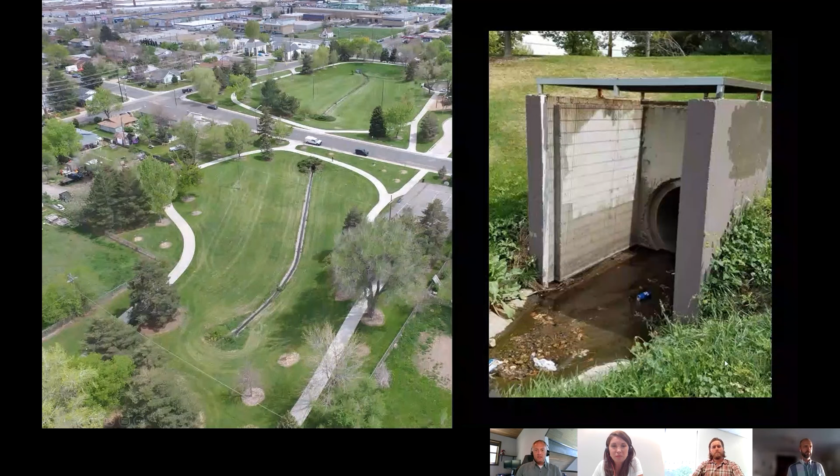What really prompted the revisioning of this park was a site visit with some park planners in 2015. And we saw this outlet structure and really started to question the safety and the concern for how the site was functioning, not only as a park, but also for the detention. So in 2015, we were able to partner with the Office of Green Infrastructure to apply for a grant through our Denver Department of Public Health and Environment to really evaluate different options for retrofitting this park.

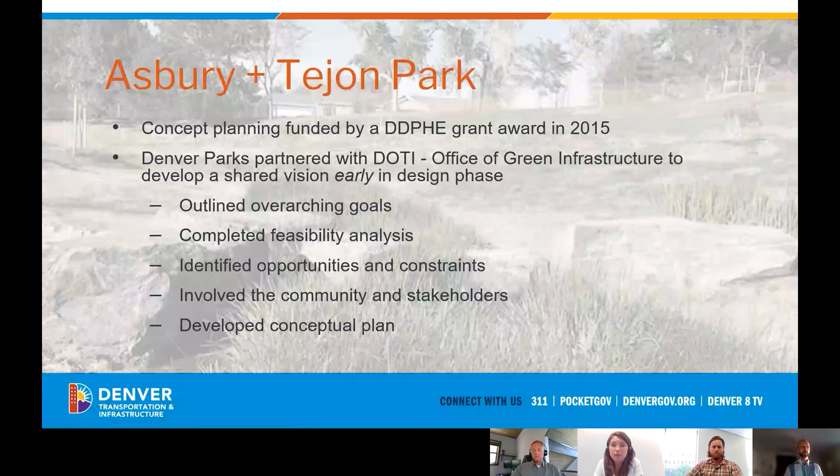And what really made this partnership successful was that we partnered very early in the planning process. So we were able to initially understand what each department's goals were from a water quality and stormwater detention standpoint, but also what we needed to accomplish within the park setting. Then we did the technical analysis, and that really allowed us to understand the opportunities and constraints that would help meet each other's goals. And then we had a very robust community outreach process that helped ultimately develop our concept plan.

So the community planning process was, again, very vital to the design and planning process. It took place over 12 months, and we did 3 formal public meetings where we met in the evening and reviewed the goals and different concept plans, different amenities that could or couldn't be included in the park design. And then we had one event in the park.

And that was really important as well because it provided an opportunity to educate the community on what was the function of this site first and foremost. It protected their community from flooding events, but also what are some of the other city goals? Improving water quality, enhancing and increasing our biodiversity within our park system, and reducing irrigation. And that ultimately led to a really balanced design that helped meet everyone's goals and the community's vision.

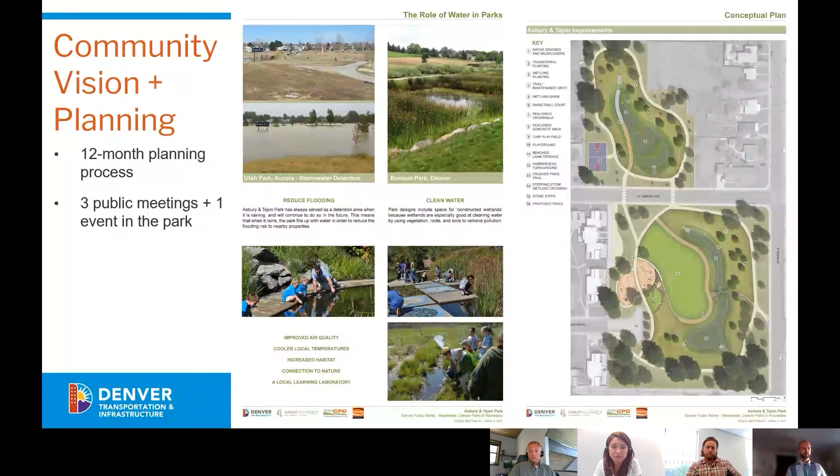So this rendering showcases what was ultimately the basis for design as we progressed. And you can see there's more flexible space for recreation, and we were able to reduce some of that turf landscape and reduce our irrigation consumption and provide a more balanced, native, and active recreational space for this community.

And in 2018, Greater and Greener held their conference in Denver, and Toro awarded Denver Parks and the design team with an Innovative Design Award. And with that award, we received a $50,000 grant to design and install interpretive signage that will be installed later this year. Now I'll turn it over to Josh Eldridge to go into a little more detail of the design process.

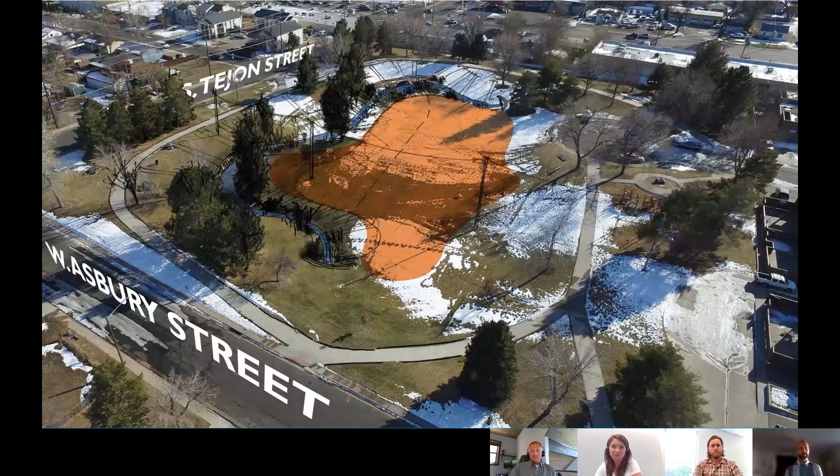We also wanted to create more usable recreation areas for the park and the community that accesses this space, while connecting to nature in a way that was meaningful and informational, while also protecting the existing trees for a park that had been established over 50 years ago. We were also looking to lower maintenance requirements and make the park safer. There were issues with lighting and access around how the park was being currently used, and we wanted to make sure that we utilized crime prevention through environmental design principles to make sure that community users felt safe in this new space.

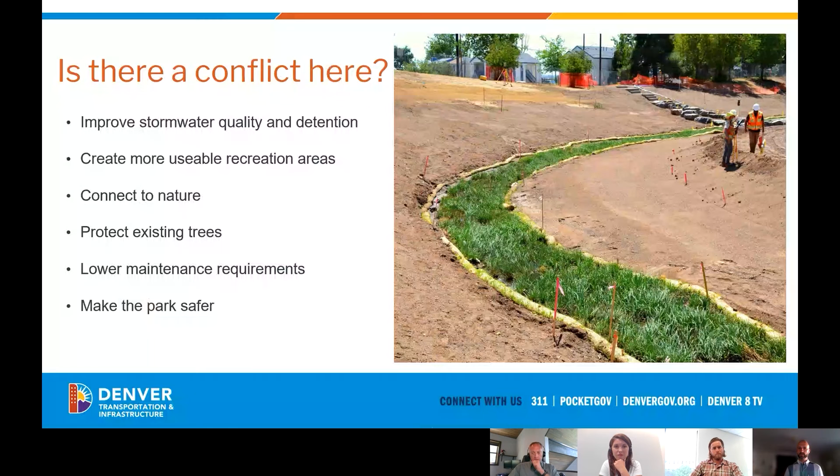So in order to balance all of those competing objectives, which oftentimes are very complicated in and of themselves, we looked at how we could realign the channel and remove the concrete pan from the middle of the park to improve the play area. We concentrated the detention capacity to the north pond, which allowed more of the park and program space to be concentrated in the south pond.

We looked at vegetating the wetland channel, utilizing wetland sod to help expedite the stabilization and plant growth within that wetland channel. We converted a lot of the turf grass that surrounded the basins into native mixes, which also allowed us to reduce the irrigation water usage for those areas. And we did that with a diverse native seed mix that really leveraged the understanding of the site soils with the objectives of what this park was.

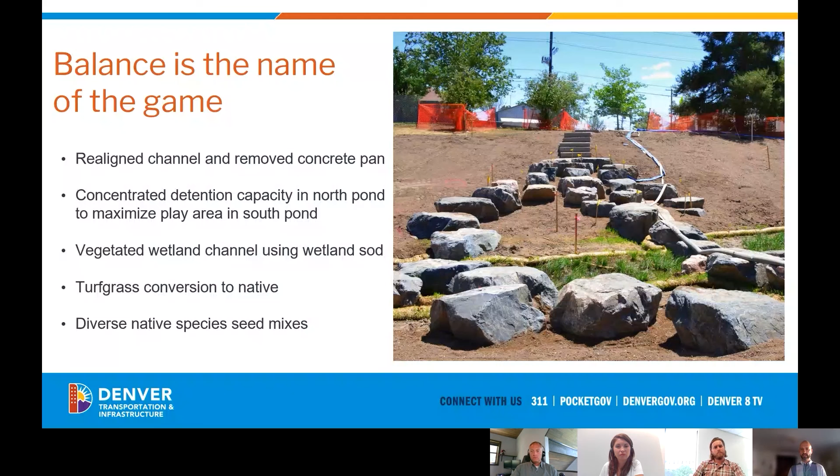We were able to expand the playground and move it away from the housing complex that borders the western side of this park to really make it feel like it was a playground for the larger community and not just the one section of housing that was closest to the park.

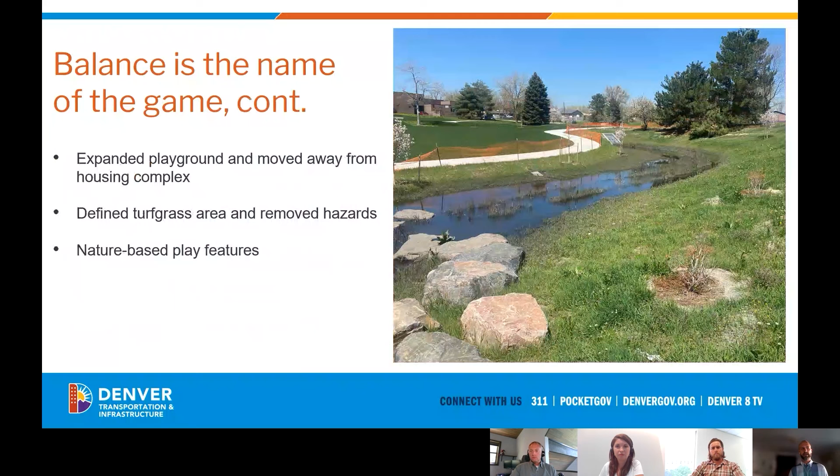We also defined the turf grass areas and removed both utilities as well as that concrete pan that defined the initial concrete trickle channel. We also utilized nature-based play features to increase the number of play features that the community could utilize. Blake will touch on some of those nature-based features later, but that was really an important amenity that allows kids to have that connection to nature that traditional playground areas don't always afford.

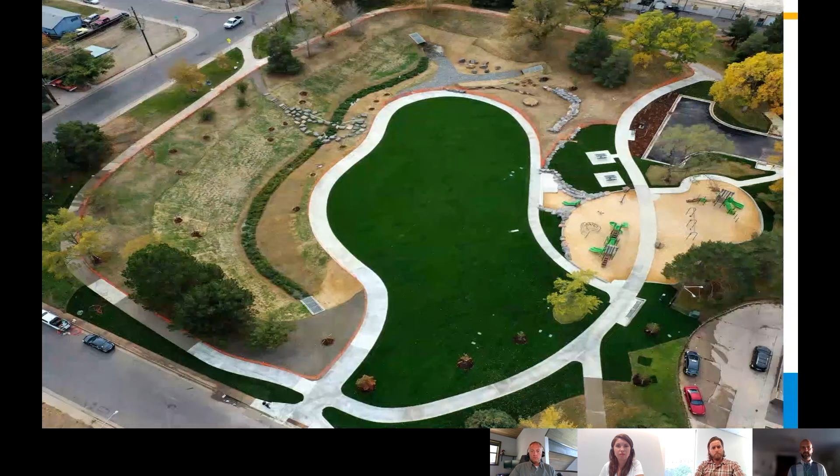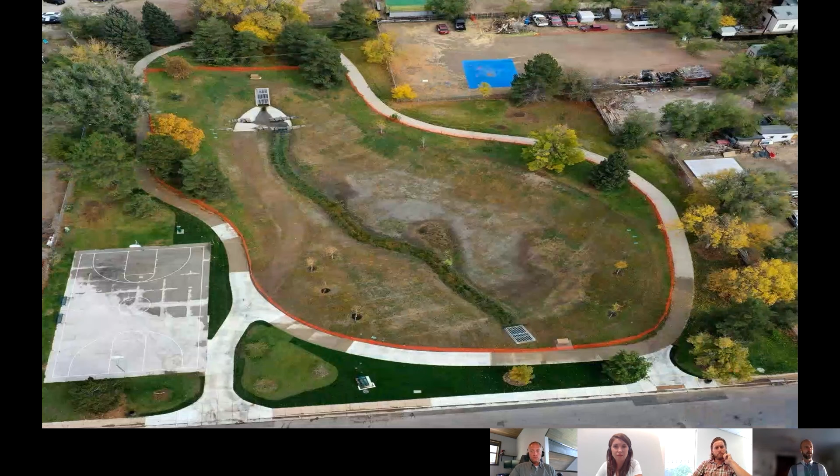So we started with this image, and we were able to create a design that really did balance a lot of different competing objectives through regular communication and collaboration with a diverse set of disciplines and expertise. We were able to really create a vision that allows this community to be proud of the space that they have, as well as benefit the city's objectives of improved water quality throughout the city. Now, Don will talk a little bit more specifically about some of the engineering challenges that we had for this project.

I don't know how well you can see this drainage map on the screen, but the blue tributary area on the north drains directly through the park. The main thalweg runs through the park. We call that the direct basin. But the yellow basin on the south really is tributary to Evans Avenue, but there is a diversion pipe. It's a 48-inch pipe that diverts low flows into the park. So we call that the diverted basin. And those two are kind of important as far as what we want to design for in the design parameters. I'd say the north tributary is 133 acres. The south is 143. So that's about how much drainage area we're handling here.

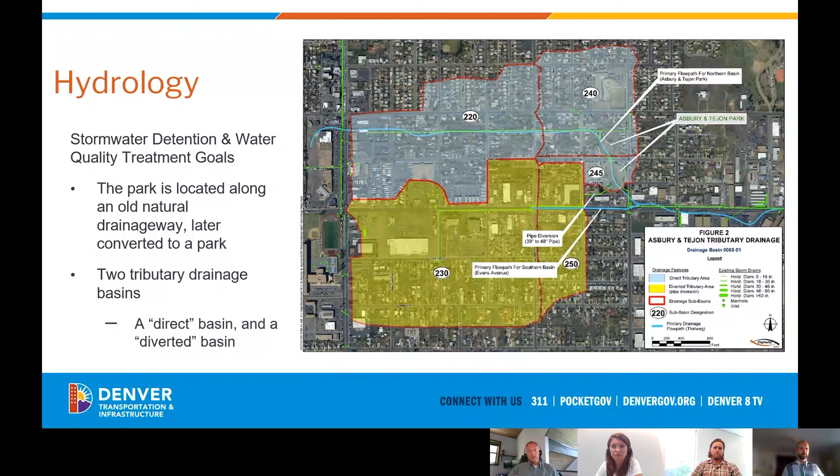So as we were saying, everyone wants more. We're trying to do a lot of things in this fairly small space. And if you're not careful, you can end up treating all the water quality that you want, meet all your goals, but you have no recreational opportunities. So trying to balance that, I think there were some hard parameters that we had to hit.

The park had already served in a stormwater detention capacity, and it had 11 acre-feet of volume. I felt like we had to maintain that. If we reduced that volume by any means, it would end up creating flooding issues downstream. The receiving drainage system below this park is undersized, and any reduction in volume here would negatively affect flooding downstream. So that was kind of a hard number.

Areas where we really tried to balance the design between play field and water quality volume was one of the main ways to balance this. If we treated both of those tributary basins, our goal would be 4.7 acre-feet of water quality capture volume. Having laid out the vision of the park, trying to balance everything, we ended up closer to 2.1 acre-feet of water quality volume. And that fully serves that northern direct tributary basin. So while we weren't able to treat both in this limited space, I think we were able to treat the direct basin, which is a good compromise in balancing this whole system.

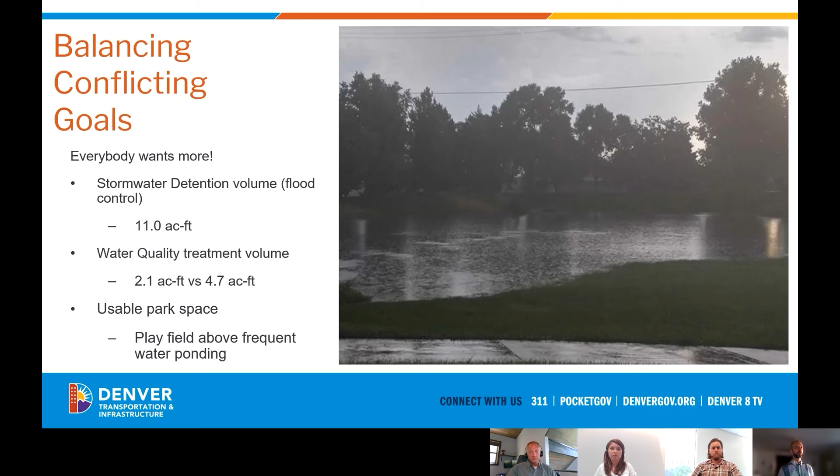So another part of the balancing act is drain time. A lot of times a detention pond may be behind an old warehouse building or something, not out in an open park like this with a lot of people recreating. So we want to balance that. The longer that we hold water, probably the better water quality treatment we get, but we don't want it sitting there for extended amounts of time in this park setting.

I like this picture here on the left. That's the original outlet structure in the old park. And as you can see, somebody just ripped off the front of the outlet structure, probably an orifice plate or something. We're not really sure when that happened, but I think it points to the fact that, in a park setting like this, when water doesn't immediately drain out, people can view it as a problem. So we wanted to balance that drain time.

And it's really, for me, one of the lessons learned on this project, and it has two parts. One is we have direct base flow running through the pond. And I'll just say, I learned that you really want to try to anticipate what that flow rate is.

Here, every time I went out and looked at it before the project, it hardly seemed like there's any base flow at all. But after construction started and after it was completed, we're seeing quite a bit of base flow going through, and our orifice structure was not sized to handle that. So we had a lot of ponding water at the beginning that we didn't want.

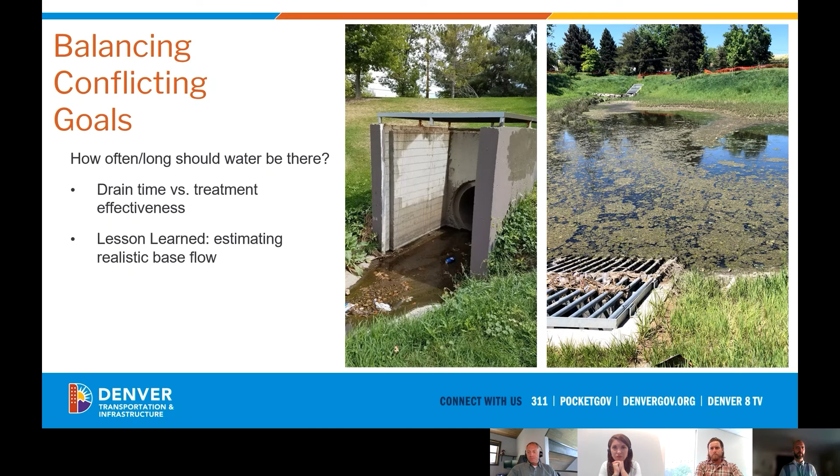Thank you for that, Don. Asbury and Tejon Park required a path wide and competent enough to support City and County of Denver maintenance vehicles. These vehicles were to access both outlet structures and weigh up to 70,000 pounds. In order to reduce imperviousness within the park, the project team decided to utilize void-filled riprap as a path material. The proposed design was 2 feet of VFR over Tensar TX 160 geogrid.

Unfortunately, the expansive soils and the mucky conditions did not allow for an approvable proof roll. After some time and thought and consultation with a geotechnical firm, the VFR depth was doubled and we upgraded the geotextile. This application still failed to support heavy on-site construction equipment. The solution was a more conventional approach, a 6-foot depth of VH boulders pounded on top of each other without any additional soil filling the voids. Then the VH riprap was top dressed with some VL riprap to interlock and provide a smooth driving surface for City and County of Denver vac machines.

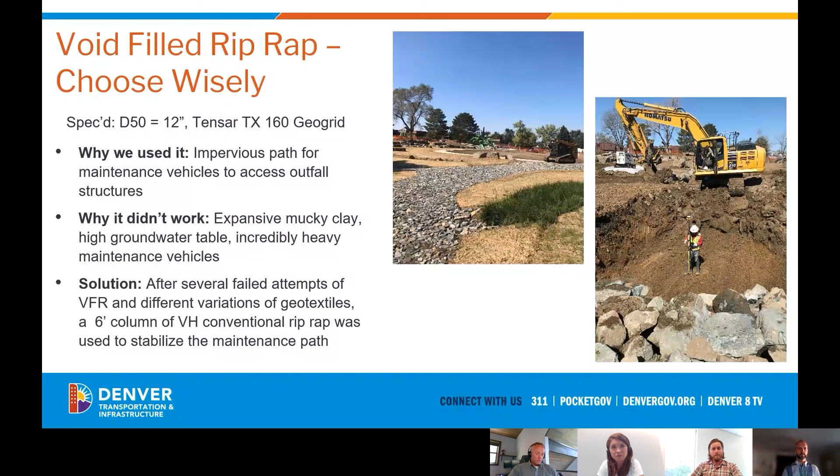Next, we'll talk a little bit about nature play. Nature play leaves a sense of being in the wilderness while in the city and is becoming more and more popular in Denver parks. Utilizing project collaboration with Parks and Rec and with forestry, the contractor was able to pick up downed trees from a nearby forestry yard and chainsaw them into pieces of art. Some of the specific park features included log stairs, a ghost grove, and a log flume.

These features not only are aesthetically pleasing to the public, but are incredibly customizable, leaving each park with its own artist interpretation. There are some challenges with these play features, including wood being less forgiving to work with. Capturing desirable surface slopes was a challenge, and increased coordination between the project team and contractor. But in the end, the extra work is worth the custom product that makes each park unique in the City and County of Denver.

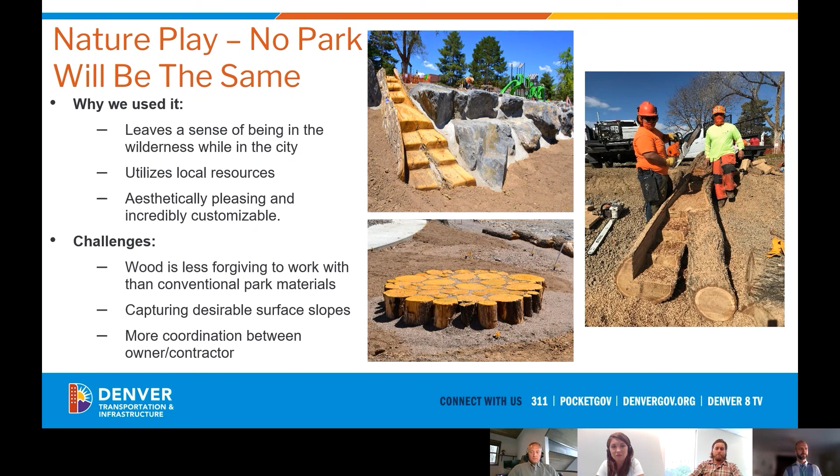Some of the issues with tying in a park's old irrigation system and a park's new irrigation system include unexpected leaks, non-compatible wiring, and faulty components. Each time the project team ran into an issue with the old system, progress was delayed. Ultimately, there were unexpected costs added to the project as the contractor ended up performing work outside of their original scope.

Other issues arose from the proximity of the irrigation alignments to mature trees on site. Forestry specification prohibited excavators in tree protection zones. Air spading was not allowed due to potential of asbestos on site. And hand digging was also not always possible as root systems were too dense to insert pipes through. In the end, the contractor performed much more hand digging than anticipated. Directional boring increased installation costs significantly, and additional time was added to the contract.

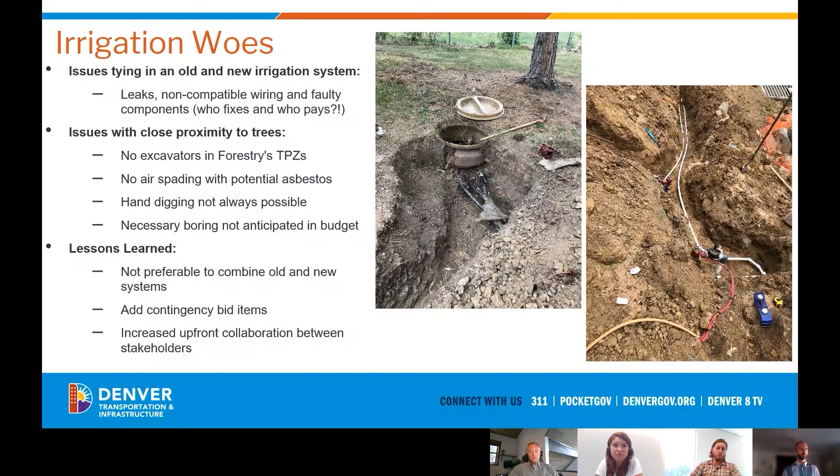A more upfront, collaborative approach in retrospect, involving all stakeholders during design, may have been able to flush out some of these potential issues, making the scope of work more transparent to the bidders and ultimately more cost-effective for the city.

As construction wrapped up and the seed and sod began to take root, the project team installed the elliptical slot weirs on both the outlet structures. After the first large storm event, it was apparent that the weirs were not allowing for optimal detention drain times. As trash and debris filled the basin from the commercial neighborhood, the weirs clogged. Water levels rose for long periods of time and created anaerobic conditions which killed off the vegetation in the entire bottom of the detention basin.

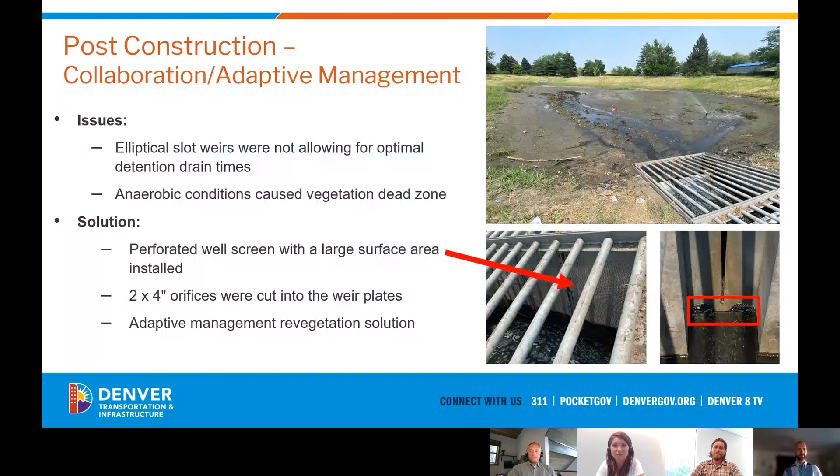So the solution was a collaboration between the project design team, CCD Green Infrastructure, and CCD Wastewater Operations. Wastewater Operations quickly fabricated a perforated well screen with a large enough surface area to avoid being easily clogged by trash and debris. Then two 4-inch orifices were cut into the weir plates, calibrating the weirs with the base flow and the water quality parameters necessary. Lastly, our great landscape architect was brought on board as adaptive management partner to study the basin, analyze the soil conditions, and recommend site-specific vegetation for long-term success.

So some of the final thoughts: communication and compromise, they are key. Community buy-in is very important in projects like this. Balancing stormwater and recreation takes thoughtful approaches and a lot of patience. And collaboration doesn't end just when construction ends. So I appreciate everybody listening to the presentation, and it's been a pleasure presenting some of the project history from planning, design, and construction of Asbury and Tejon Park.